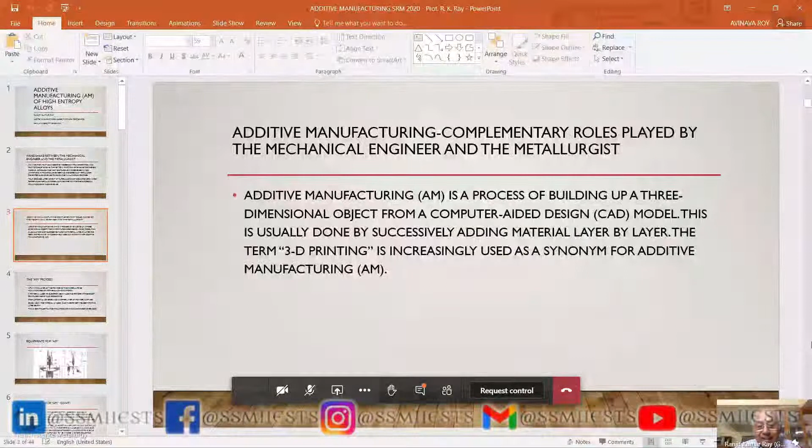Yes, that's the one. You see, the topic of my lecture is additive manufacturing of high entropy alloys. There is a reason why I've chosen this subject.

Can I have the next slide, please? You see, this is an area where the mechanical engineer and the metallurgist have come together. Modern metallurgy, as we know about, started from, say, about 1940s. The reason was rather strange. That was with the invention of the jet engines. The mechanical engineers reigned supreme during those days, and they built all kinds of machines. The metallurgist was a bit subdued. Now, while making the jet engines, the mechanical engineers realized for the first time that material may be as important as design. And therefore, they called in the metallurgist to help them out. And that is how the golden days of metallurgy began.

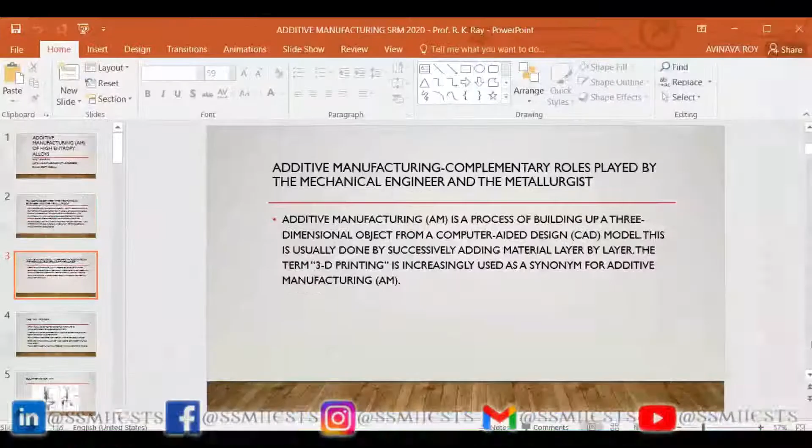You see, the present situation is such in our country that in industry, people will prefer hiring a mechanical engineer with some knowledge of metallurgy than a metallurgist. In many industries, it's happening like that. The reason is we have not changed much from where we started. If metallurgy has to survive, the metallurgist has to venture out into other areas. For example, the most important area where a metallurgist can go to is the area of manufacturing science and engineering. As you know, additive manufacturing is a new way of manufacturing, which is capturing the imagination of all engineers. And this is also very much dependent on the nature and properties of materials. So this will be an area where the metallurgists must jump in, and don't leave this area entirely to the mechanical engineers. So metallurgy has to change. That's what my feeling is.

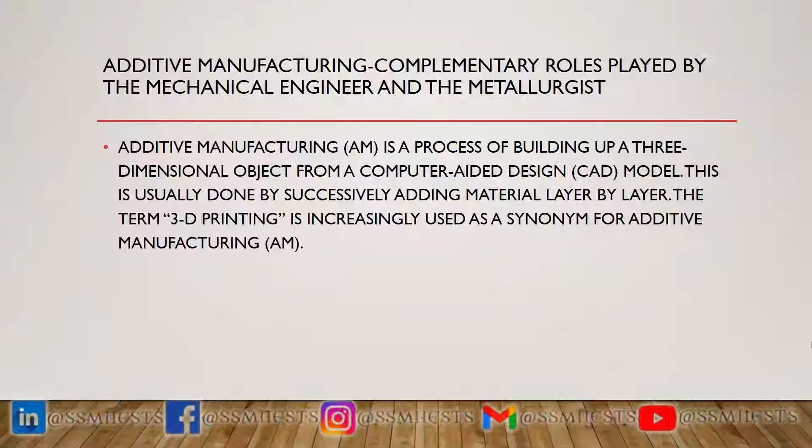Now, additive manufacturing is an area where complementary roles are played by the mechanical engineer and the metallurgist. And we know what additive manufacturing is. It's a process of building up a three-dimensional object from a computer-aided design, or CAD model. This is usually done by successively adding material layer by layer. The term 3D printing is increasingly used as a synonym for additive manufacturing. Can I have the next slide, please?

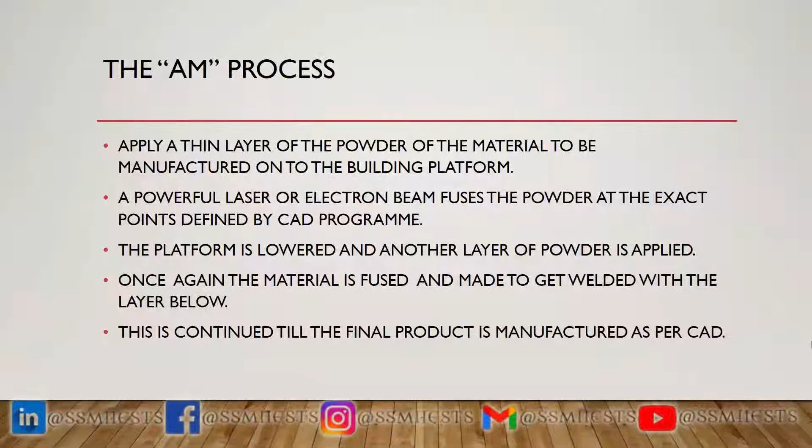Well, the method is simple. What you do: you have a building platform, and you apply a thin layer of the powder of the material to be manufactured onto the building platform, and then you get it fused or melted by using a powerful laser or electron beam, and the whole process will be dictated by a CAD program. Then the platform is lowered, another layer of powder is applied. Once again, the material is fused and made to get welded with the layer below. This is continued till the final product is manufactured as per CAD.

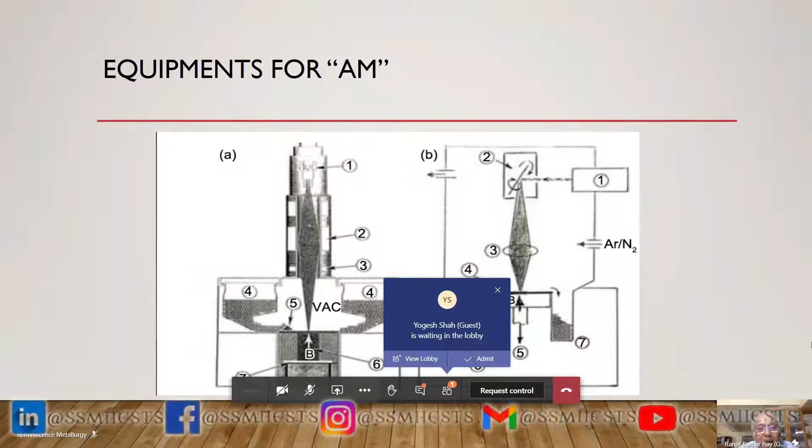Well, these are two diagrams showing on the left-hand side: it is the electron beam equipment, and on the right-hand side is the laser equipment. Next one, please. Yeah, these are all the different parts, so it's not very important.

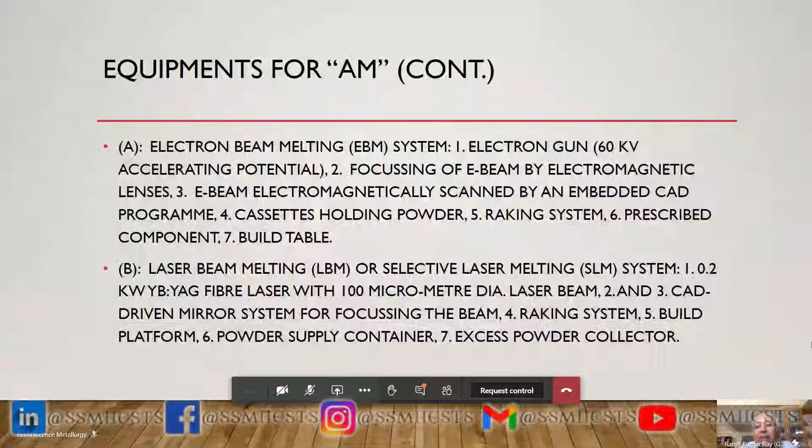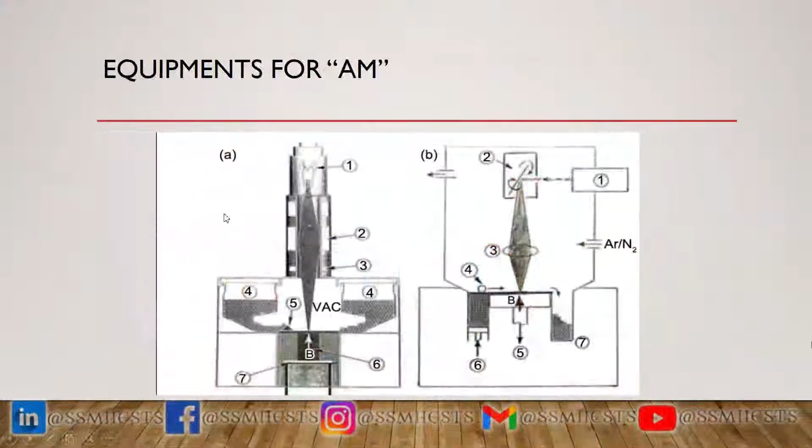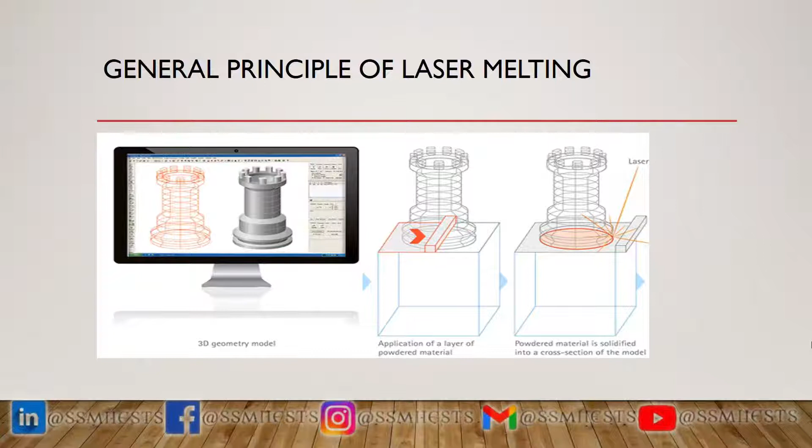Yes, please, next one. So you see that if you look at the area bordered by thick black line, the one at the left is the design produced by computer, a CAD design. And the one to the right is the final shape of the material to be manufactured. Then we come to the right-hand side. The CAD program is used to dictate the whole process, so that in the first figure on the right, you'll find powder is added on the platform, and then it is fused. Next slide, please.

And this process continues till the whole substance is manufactured as per the CAD program. So you see, here is a case where the design dictates the product.

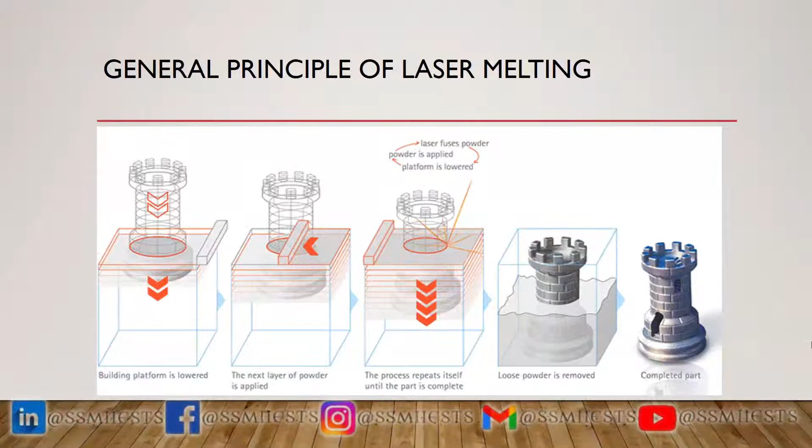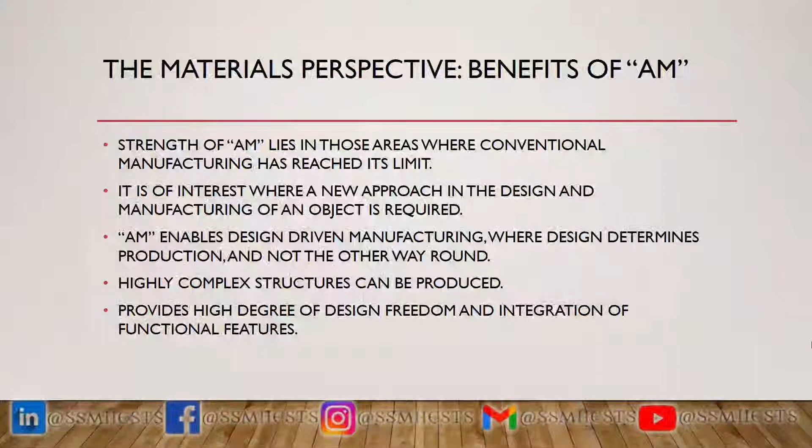Now, why do we go for this additive manufacturing process? There are several points to be considered. The strength of additive manufacturing products lies in those areas where conventional manufacturing has reached its limit. It's of interest where a new approach in the design and manufacture of an object is required. AM enables design-driven manufacturing, rather than the other way around. Highly complex structures can be easily produced by this method, and it provides a high degree of design freedom and integration of functional features.

So what are the requirements of materials for AM? Materials which can be processed by AM must meet two main criteria: good weldability to avoid cracks during solidification, and the raw materials are very important. These must be available as spherical powders with a size of a few tens of microns in order to achieve good packing density and homogeneity.

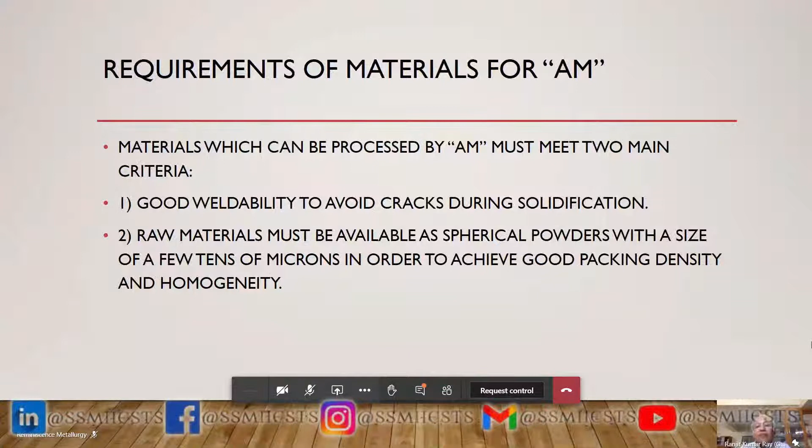So what are the characteristics of these AM products? The most important thing is that here you can achieve a very high cooling rate and directional solidification, which you do not get in cast materials. Grains are much finer here, but there are some bulk defects as well as surface defects also.

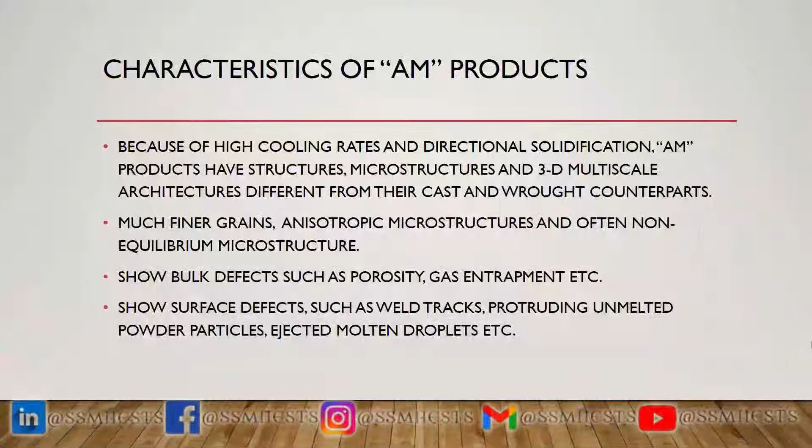You can produce various kinds of microstructure in an AM product. So this is one; you can see the columnar structures.

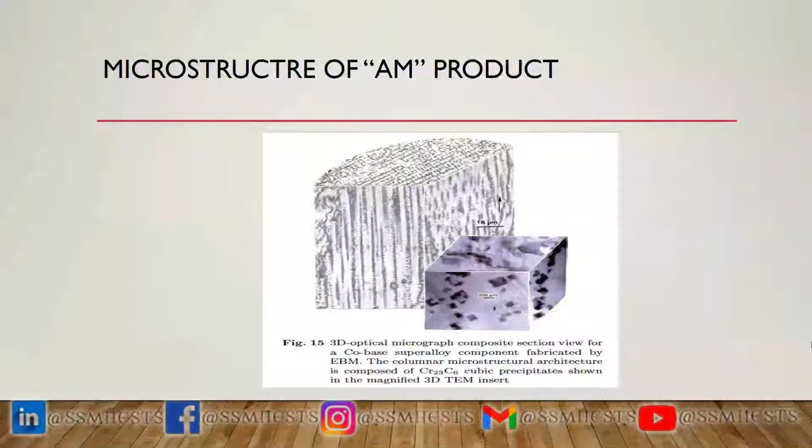You can have a microstructure of this type.

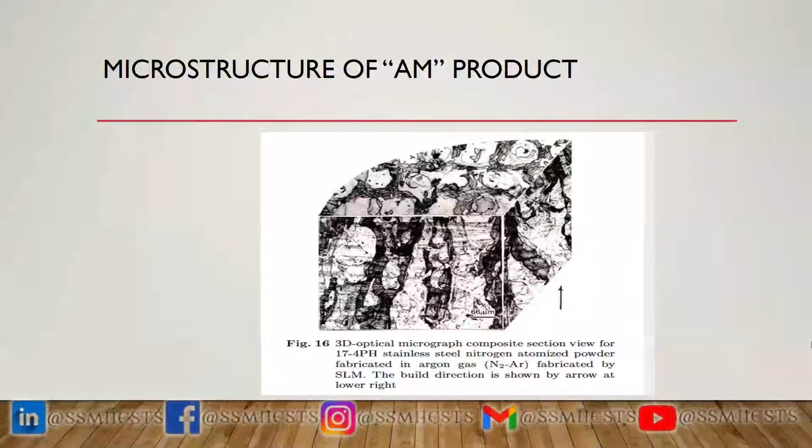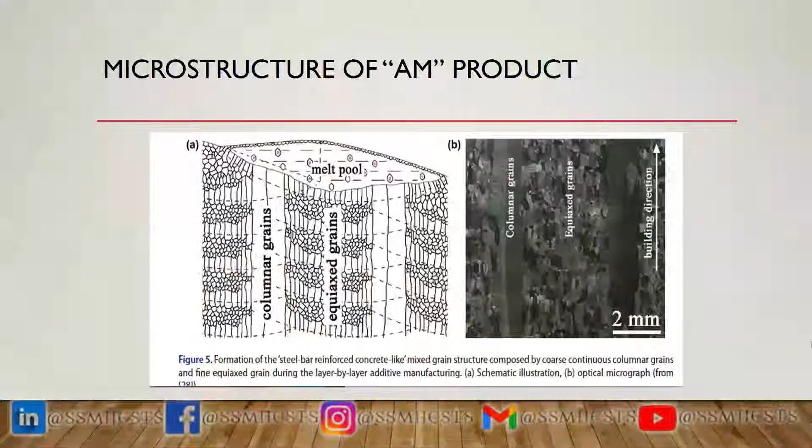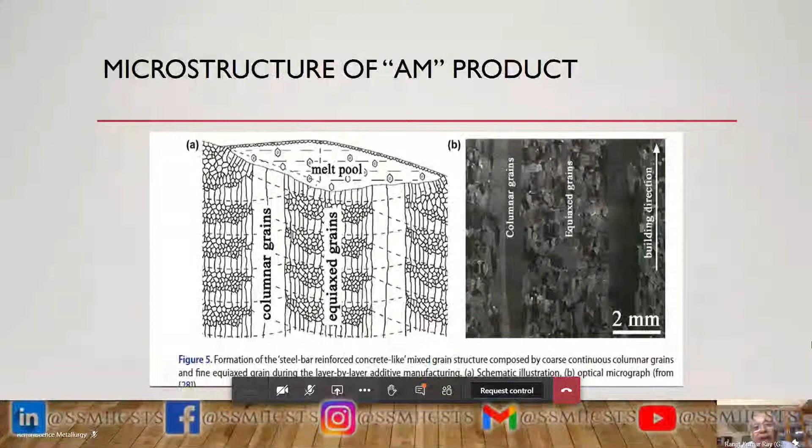You can have columnar grains and equiaxed grains side by side. So different types of microstructural architecture can be achieved by this process. This is a unique characteristic of the AM process.

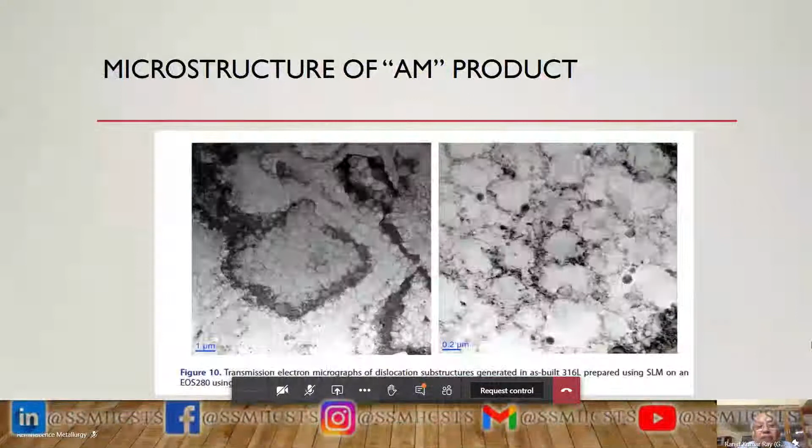This is again another microstructure. Just to show you that you can really get the microstructure of your choice by controlling the parameters.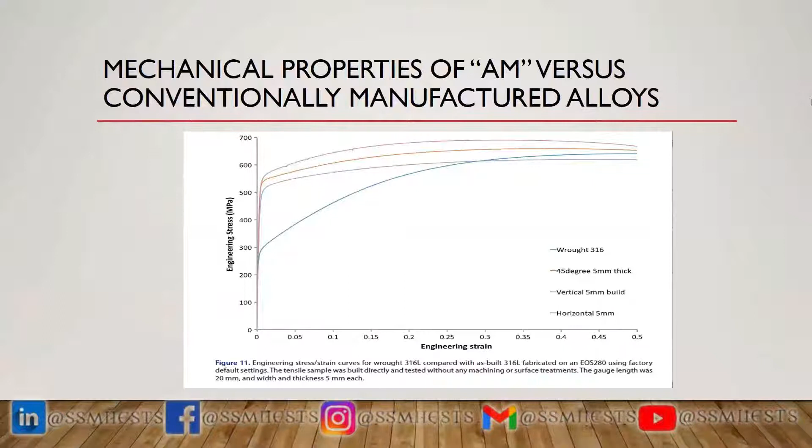Typically, these AM metallic products have been attempted till now: nickel-based superalloys, cobalt chromium alloys, stainless steels, titanium-based alloys, intermetallics, low alloy steels, refractory metals, etc.

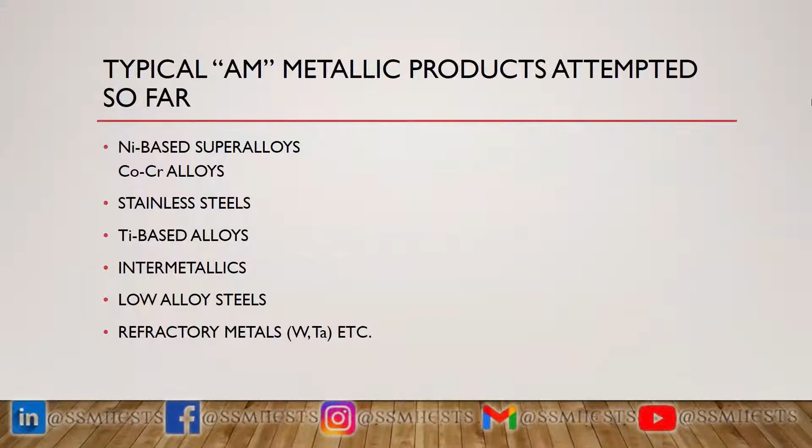You see, now I will consider the high entropy alloys. We know what the method of additive manufacturing is. So the topic of my lecture is additive manufacturing of high entropy alloys. The reason why I've chosen this area is I started working in this area last year, and I'm really fascinated by this area.

Now, what are high entropy alloys? These are rather recent, as I said, and the first result was published in 2004. So these high entropy alloys can be defined both on the basis of composition and configurational entropy. So what is the composition-based definition? These are alloys composed of 5 or more principal elements in equimolar ratios.

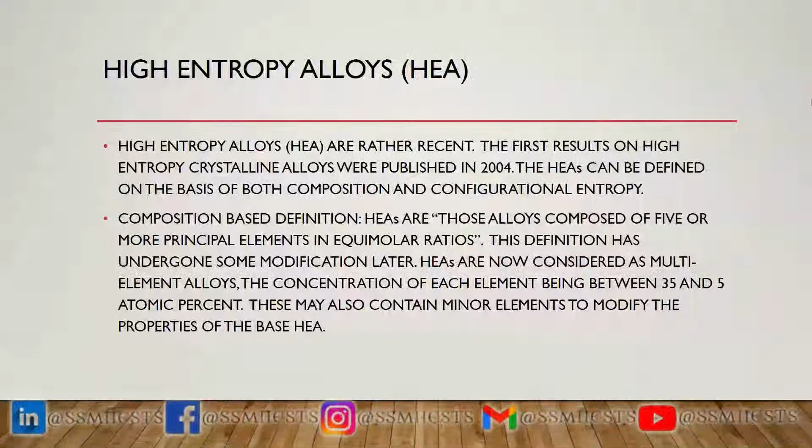You see, as metallurgists, we are aware of alloys where we have got maybe one solvent where a few other solutes are added. So the main component is the solvent, and the solutes take a minor part. But here, this is totally different. Here, the alloys are composed of 5 or more principal elements in equimolar ratios. Later, of course, this definition has been changed. So nowadays, high entropy alloys are those where the concentration of each element is between 35 and 5 atomic percent, and there may be some minor elements also to modify the properties of the base.

Next one, please. Can I have the next slide, please?

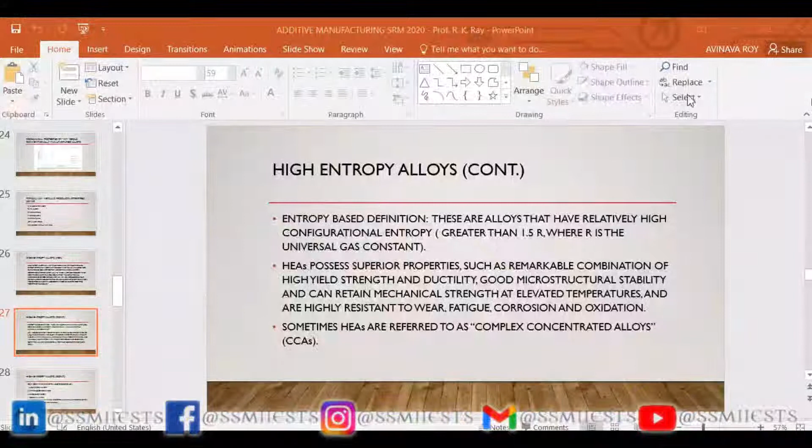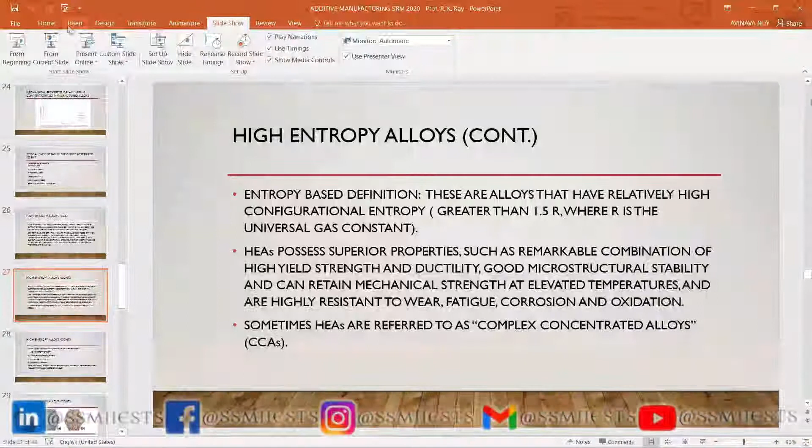Yeah. So what is the entropy-based definition? These are alloys that have relatively high configurational entropy. So how high? Greater than 1.5 times the universal gas constant. So high entropy alloys possess superior properties, such as a remarkable combination of high yield strength and ductility, good microstructural stability, and can retain mechanical strength at elevated temperatures, and are highly resistant to wear, fatigue, corrosion, and oxidation. Sometimes these are also referred to as complex concentrated alloys, CCAs.

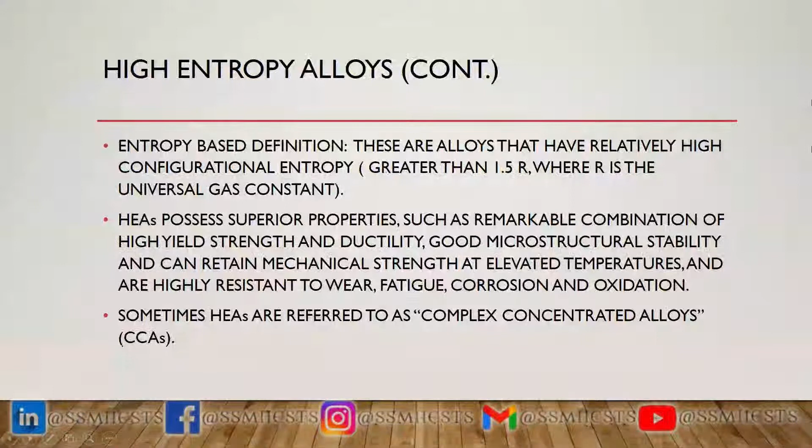Next one, please. Updating, sir. Pardon? Yeah, I got it.

You see, there are 4 core effects which are often used to describe the high entropy alloys. One is the high entropy. The second one is high lattice distortion. You can see that if there are 5 or more principal elements, there will be a lot of distortion in the lattice. The third one is very sluggish diffusion. And the fourth one has been named the cocktail effect. The name was given by Professor S. Ranganathan of IISc Bangalore. So the cocktail effect means exceptional materials properties often result from unexpected synergies.

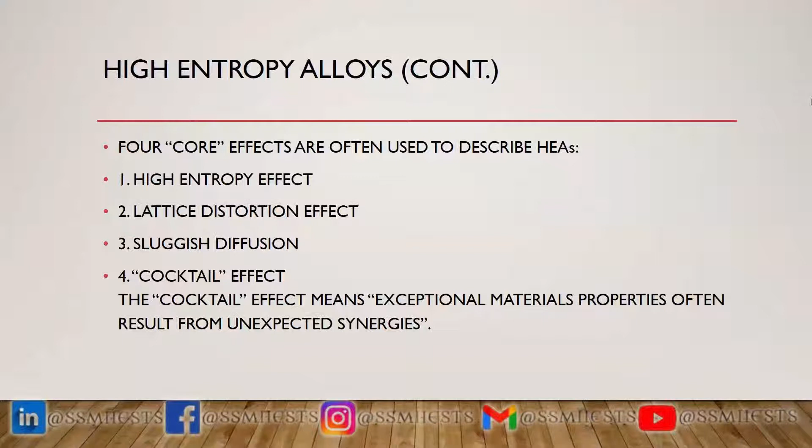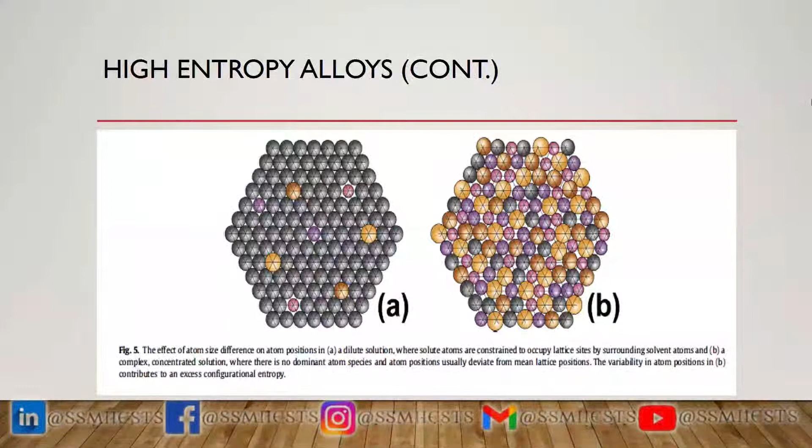Now, what is the effect of the high configurational entropy? If you have a high configurational entropy, simple solid solutions such as BCC, FCC, and HCP will be stabilized. However, in many cases, the best balances of properties are achieved for a microstructure consisting of a disordered solid solution phase and an ordered multi-component precipitate phase. Next one, please.

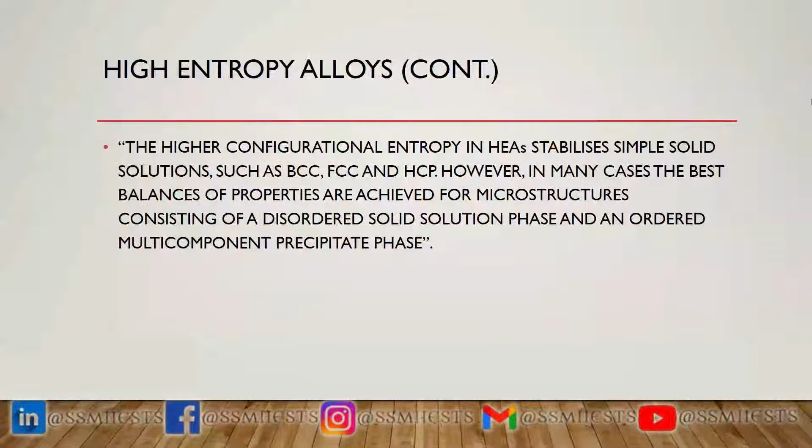Updating, sir. Yeah. The 2 major new concepts emanating from the development of the high entropy alloys are: this apparently opens a vast unexplored realm of alloy composition, and the potential to influence solid solution phase stability through control of configurational entropy. So these two distinct ideas have captured the imagination and efforts of the materials science community all over the world.

You see, look at the multitudes of alloys you can have, because the number of main elements is 5 or more. So this is a classic case where the metallurgist can use the knowledge of materials informatics, artificial intelligence, and high-level data processing, data mining. So these are most important for the metallurgist. So you see that the metallurgist nowadays has to learn a little bit of manufacturing, a little bit of computer science, and whatnot. So metallurgists must come out of their cocoons and try to diversify themselves.

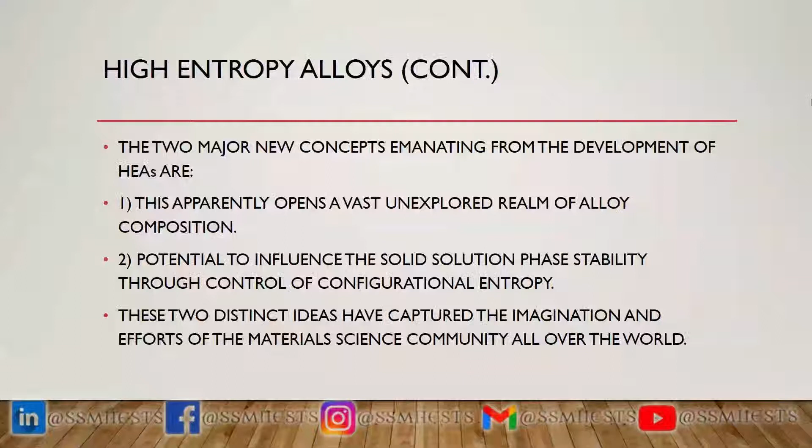Now, yes. I think we can skip that. The next one, please. Can I get back to the previous?

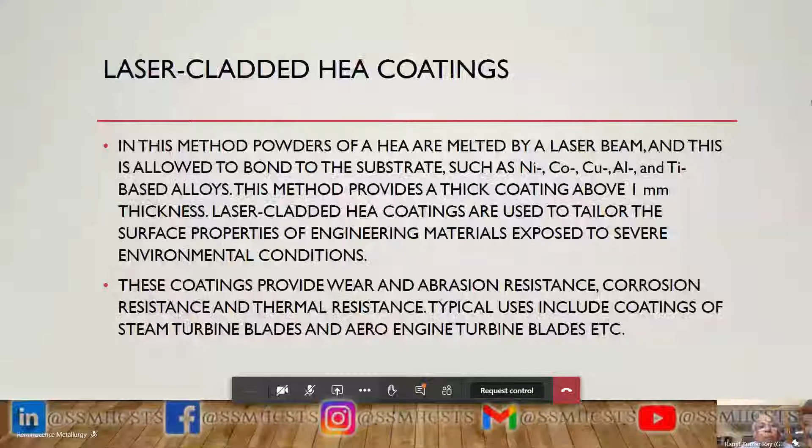One of the applications is high entropy alloy coatings. These alloys can be used as coatings on existing materials, for example, gas turbine engines. And these coatings are very hard and they last much longer. And there again, the material property space for such coatings has been given here, Vickers hardness along the y-axis and density over here. So you can see that you have a large materials property space to choose from. So this is the beauty of these materials. The next one, please.

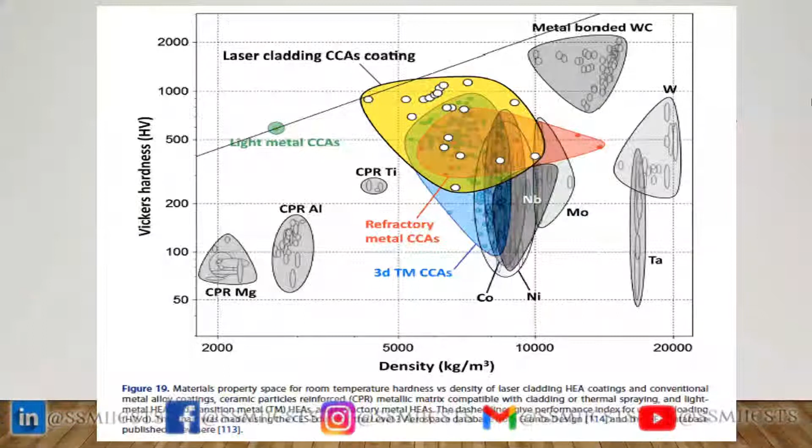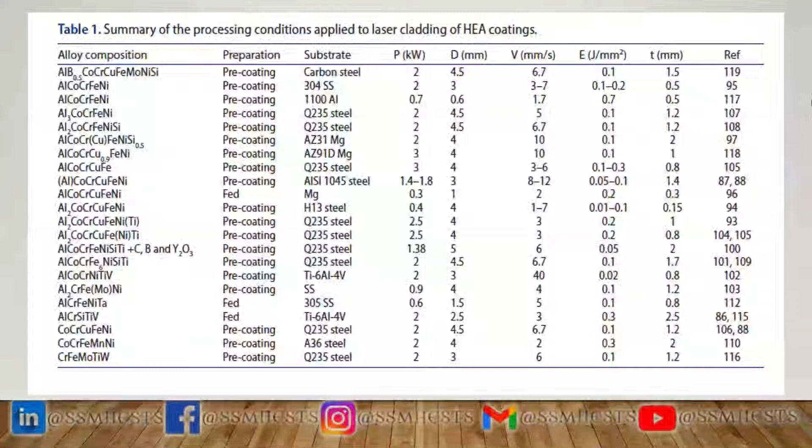Now, in addition to coatings, we also produce high entropy alloys in the bulk form. So the idea to use AM technique for producing bulk HEAs is based on the premise of avoiding slow cooling. You see, in the AM process, the biggest advantage is avoidance of slow cooling, which is common in case of arc melting or levitation melting during solidification. Due to this, the interdendritic segregation in the microstructure is minimized and the solubility limitations are avoided. So this is very interesting.

The most studied high entropy alloy system made by AM has been based on the aluminium, cobalt, chromium, iron, nickel system. Look at the yield strength, UTS, and percentage elongations of the as-built, laser melted HEA. Yield 600 MPa, UTS 745 MPa, percentage elongation 32. And look at the comparison with that for the as-cast material the normal way, where the yield is 188, UTS is 457, and of course, the elongation is more, 50%.

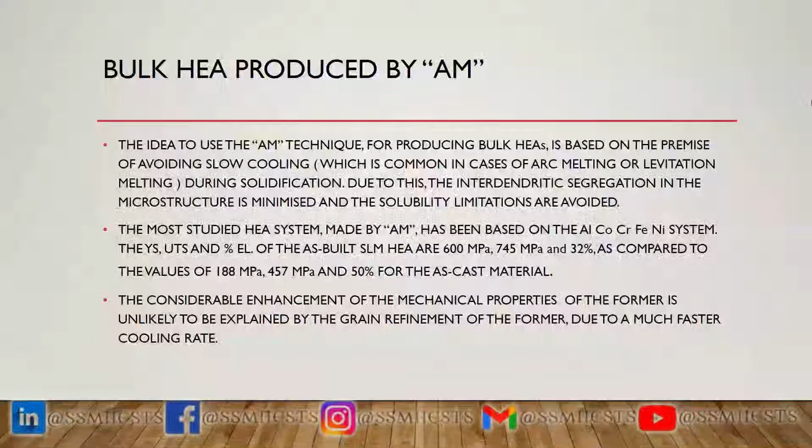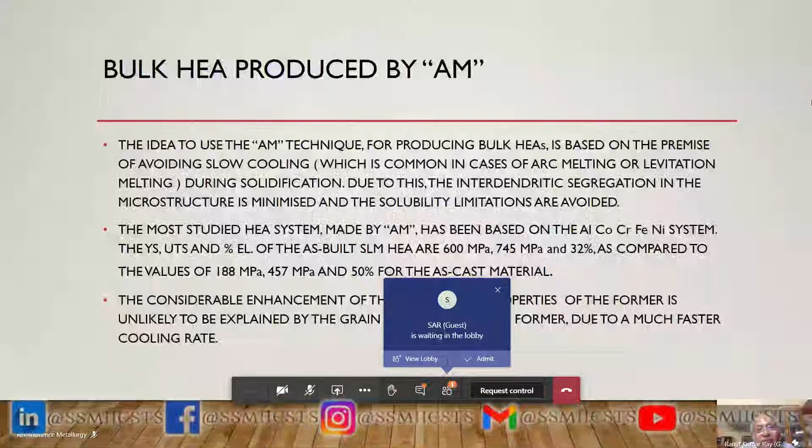So the considerable enhancement of the mechanical properties of the AM product is unlikely to be explained by the grain refinement of the former due to a much faster cooling. A lot of people try to give an account for the exceptional strength by looking at the finer grain size, but they couldn't explain it. So there are things other than fine grain size which must be considered. The next one, please.

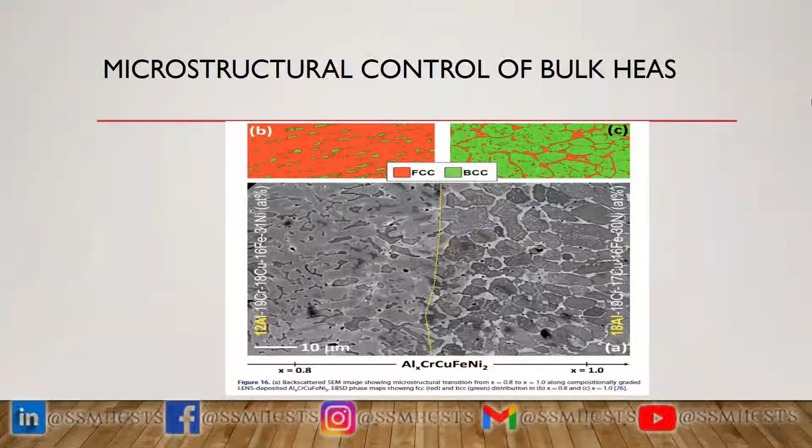Well, again, there's the microstructures that you get in such steels. We can skip that. Get the next one, please. These are all different microstructures you can get with AM in bulk HEA in a different alloy. And this is an interesting mechanical property of bulk aluminum, cobalt, chromium, iron, nickel HEA. So look at the true stress and true strain values. The red one is the selective electron beam melted product, and the black one is for the cast material using normal methods.

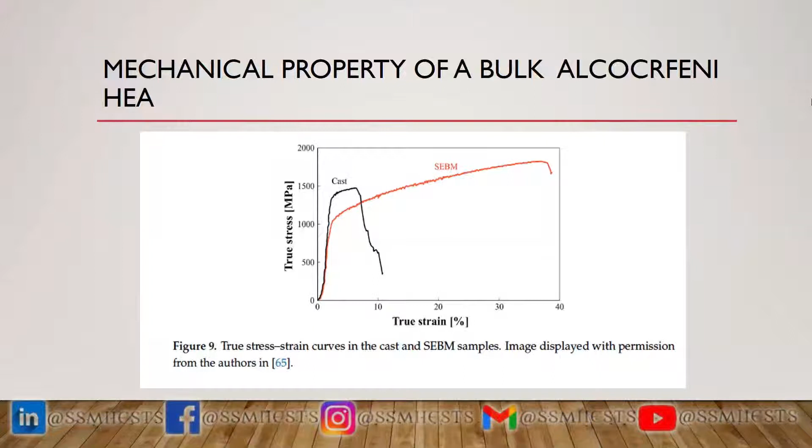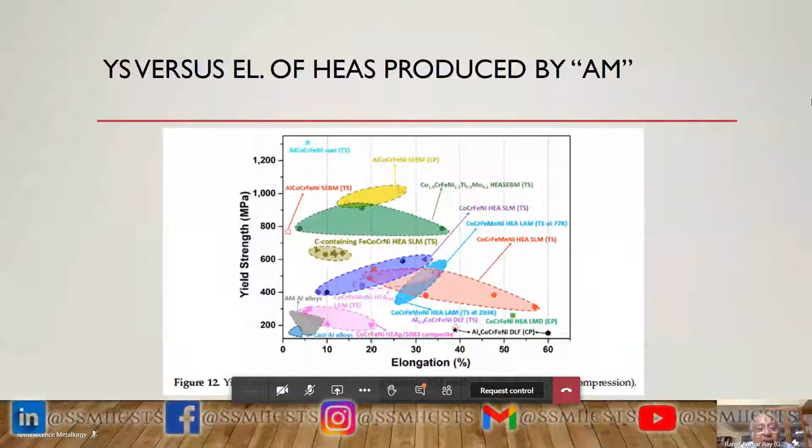So you see the tremendous improvement in properties in case of the melting processes employed in the additive manufacturing process. Next one, please. Well, again, it's a material space for different kinds of HEAs. You can see you have a big menu in front of you. You can choose. The material space is really quite big, and you can figure out what property you want and choose your material accordingly. Next one, please.

So, what is the future of high entropy alloys produced by AM? Now, high entropy alloys promise to have high potential as functional and structural materials, due to their properties which I've already told you. And they are also being considered as very good hydrogen storage materials. So this is an important point. Now, traditional manufacturing methods of HEAs, which are arc melting, spark plasma sintering, have limitations with respect to chemical homogeneity and shape and size of the bulk material. These are the incentives for using AM for HEAs. This is the reason why we should use AM for processing of high entropy alloys.

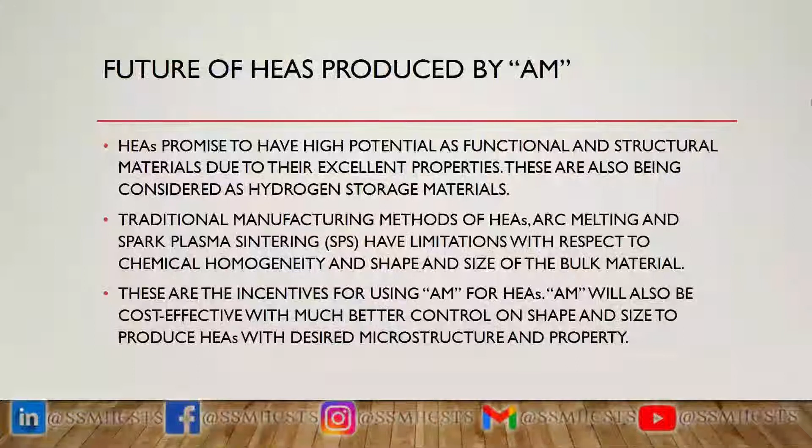AM will also be cost effective with much better control on shape and size to produce HEAs with desired microstructure and property. You can have an end product, finished product by AM process because everything is controlled by the CAD program. So once you set up everything, it can be completely automatic, and you'll have your product one after the other. Next one, please.

So what is the way forward? Now, researchers indicate that there's a vast scope of attaining exceptional mechanical performance from additive manufactured HEAs by optimizing the materials and processing parameters. And what are these? The powder size distribution, thermal gradient, and solidification velocity. Now, some theoretical understanding is still lacking about the melt-pool physics and the liquid-solid interfacial behavior. So these are the areas where a lot of work should be done. And the other thing is, there will be some highly beneficial post-manufacturing heat treatment, which should also be taken care of.

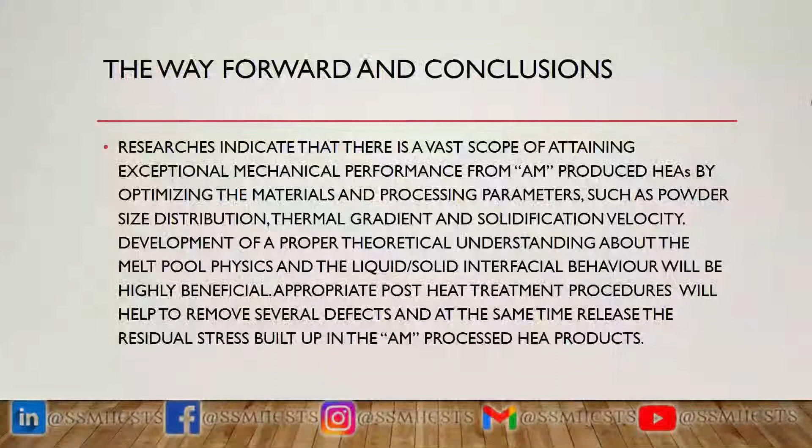Yeah. So I thank you for your kind attention. If there are any questions, I'd like to answer them.

The first question is, what is the prospect of 4D printing in high entropy alloys? Can you tell me once again? What is the prospect of 4D printing in high entropy alloys? Yeah. Of course, it will be an extension of the 3D printing process, right? So there should not be any difficulty with the high entropy alloys. You can do it with other materials. You can use it with these materials also.

Sir, you are not audible, sir. Pardon? Sir, you are not audible, sir. How come? No, he is audible. It's okay. Yeah, right. Okay, sir. Over to the next question.

What is the prospect of high entropy alloys in biomaterials? There's plenty of prospect in biomaterials, as I already showed you one slide where orthopedic implants are being made, and people are working in this area. One thing you must realize is that high entropy alloys came into being only in the year 2004. It was Professor Brian Cantor at Oxford University who first reported about it, and at the same time, Professor Yeh of Taiwan also reported about these materials.

So a lot of research is going on, and there's a huge scope of high entropy materials being used as bioimplants. You see, here you have a choice amongst a number of elements. You can find out, in a particular area where you want it, how it is going to react with the body fluids and all that, and choose your elements accordingly. So, of course, yes, there's a huge scope of using HEAs as biomaterials.